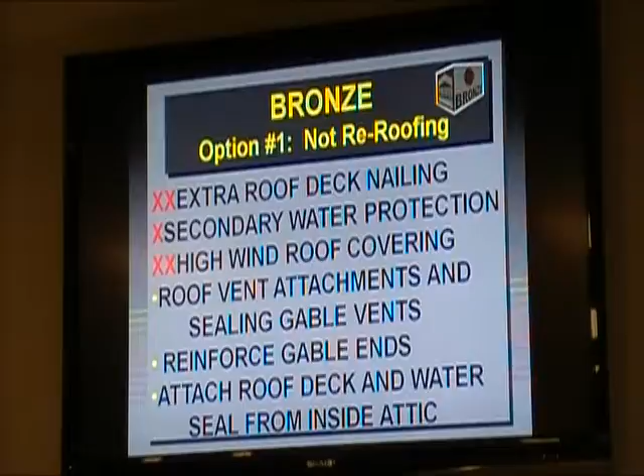You can do the roof vent attachments, and you can reinforce the gable ends from inside the attic. Now, the next slide. You can attach the roof with some effort from the inside, and the next picture shows a way that you can do that. It's actually a urethane foam that's sprayed on to every rafter and every seam all the way through the roof. And you can make it mostly waterproof from underneath.

But because the roof slope makes it extremely difficult to get to the eaves, it's not an easy process. It's relatively expensive, far more expensive than if you're re-roofing. And I don't think it's going to become a practical alternative. If you really want to be a fanatic, and I'm pretty close, you can look at this method, but my guess is we won't see a lot in North Carolina. Most of it will be done when re-roofing.

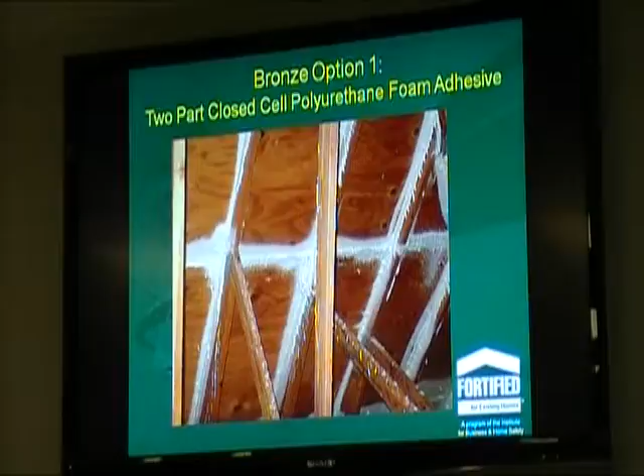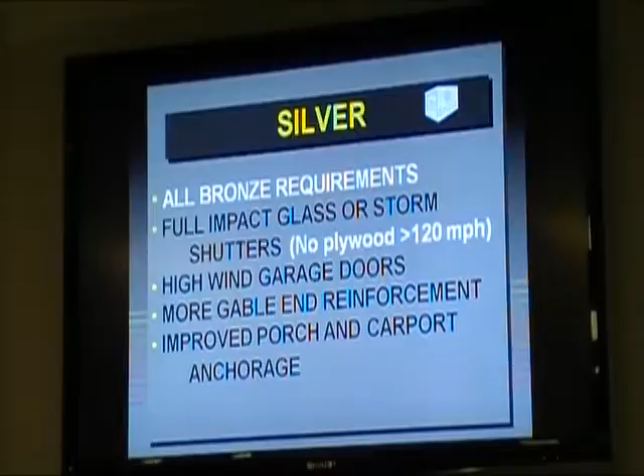Next slide. Okay, the silver requirements are all the bronze. It has to have full impact glass and opening protection. And one of the things for both the state requirements and these fortified requirements is that you cannot use plywood installed shutters to qualify. It has to be tested by a third-party testing agency, and plywood isn't going to qualify, even though it's allowed by the building code. And frankly, I'm not real sure that's a good idea. If it's in the code, I suspect it ought to be credited. But the way they've set the initial program up, that's not going to be the case.

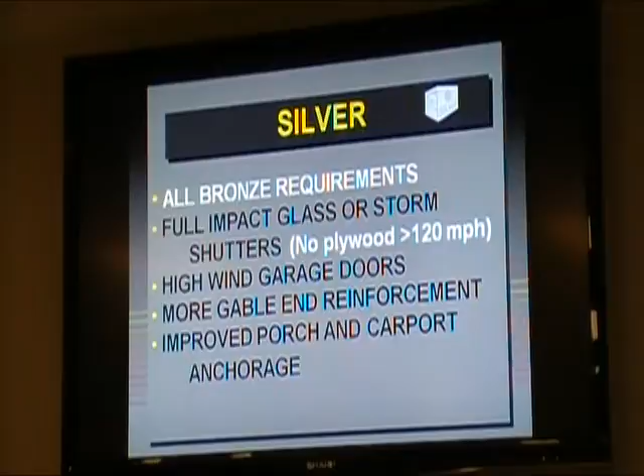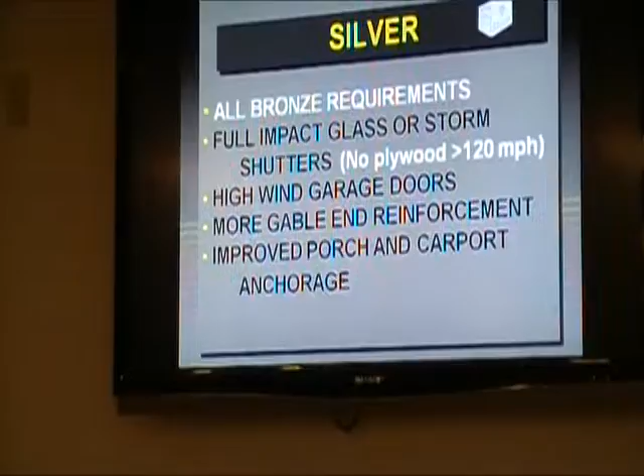You're going to have high-wind garage doors. New doors would usually qualify for that. And there's some kits that you can add to existing doors to beef them up. They're a known problem; I'll show you a couple pictures of them. There are more gable reinforcements that have to go in. And one of my pet peeves is improved porch and carport anchorage. It's a real common problem that's proven to be a real serious problem in North Carolina.

Okay, garage doors. Big wide doors, big hole. Once you get that big an opening broken open, when the door fails, and they're notorious for bending beyond the capacity of the outside frames, you put an extreme load on the roof above it, and that's a major cause of damage when the winds get up above 95 miles per hour, certainly anything above 100 miles per hour gust.

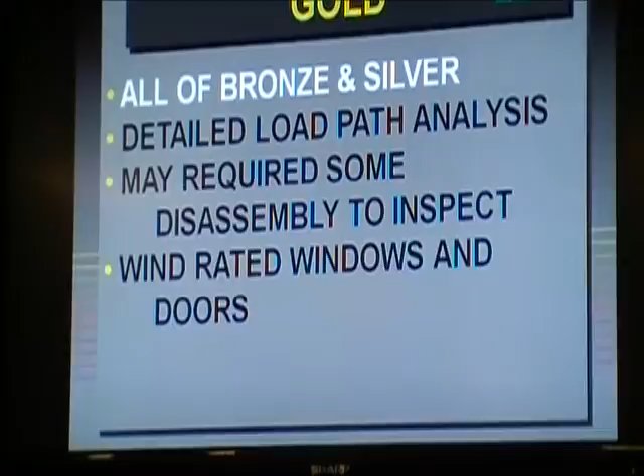And if you have a recent building, for instance, in the silver level, the impact resistance, that's been in the code for the first 1,500 feet from the ocean since 2006, and since 2009, it's been a requirement for the entire barrier island all the way back to the intracoastal waterway. So some of those things are already built into brand new houses, if anybody was lucky enough to build a brand new house in the last couple of years. Next slide.

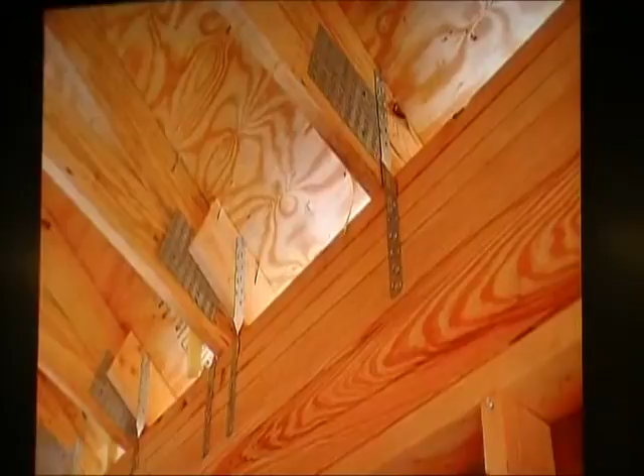So again, in this case, it's a load path issue. You've got to prove that you've got connections all the way from the peak of the roof to the bottom of the foundation. And the next slide. That's been, in many cases, common practice for a lot of the building code on the beaches going back to the 1960s after the hurricanes of the 50s.

What may not be obvious is that most of the standards that have been common practice for the beach, both required and optional by contractors, didn't take effect on the mainland communities until the mid-1990s. So almost 30 years behind the beaches, the mainland communities caught up. So what may be routine in older houses in the beach community, as soon as you cross the waterway, you may not see those features for a much more recent house. Next slide.

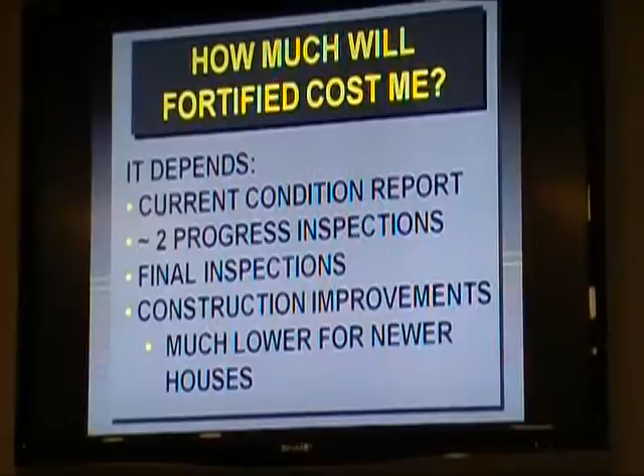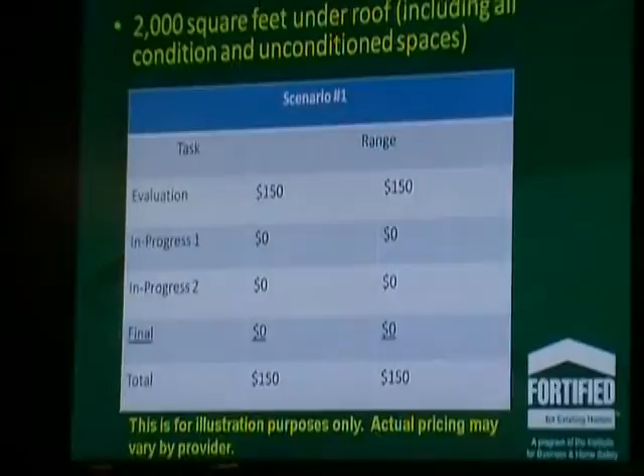These are some costs prepared by the Institute for Business and Home Safety, and the low end of the cost would be $150 for the initial evaluation, and the total is still $150 if they did it for free. And most of these evaluators are probably going to be home inspectors, so they may live nearby and not have to come far to do it, but obviously it's going to cost some labor if they have to come back multiple times. So I think this is probably an optimistic low end of the evaluation cost.

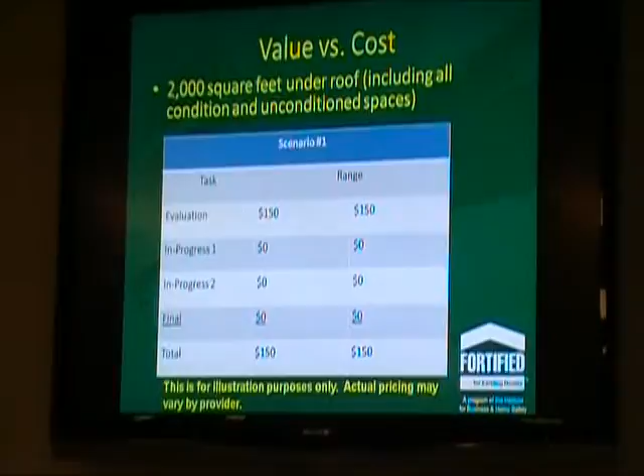Next slide. The bottom line of all this is be prepared. There are lots of hazards out there, and we know about a lot of them, and this is one thing that can help save you some insurance money. There are a lot of good ideas in this program. Some of them are going to be easy to reach, some of them harder.

But one thing is for sure, that if you're re-roofing, you ought to seriously look at the IBHS secondary water protection and roof deck nailing, because you've got one chance to qualify in the next 20 years of the lifetime of that roof. And if you don't do it, then you may regret it a lot later. I'm glad to answer any questions from the board.

Commissioners, any questions? Audience, anybody have any questions? Floor is open. Is the chart deck available to us? Can we have copies of the chart deck? Yeah. If you give me an email or mailing address, I can send you the details. How about if you email it to the town hall, and they can put it on the website to make it available to everybody? Sure. Good idea.